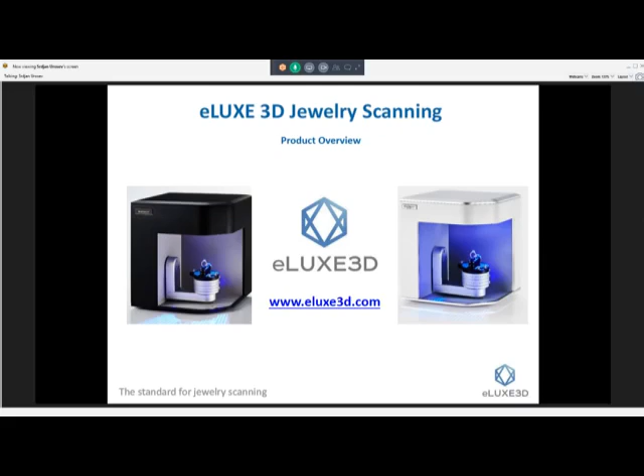For those of you who are not familiar with three-dimensional scanning, the two primary forms of 3D scanning are laser scanning or structured light scanning. Laser scanners tend to have a sweeping red, blue, or even green line that's automated or sometimes manually operated with some sort of external coordinate measuring machine, usually a fixed line that sweeps along the part, and that acquires point cloud data, which is ultimately turned into an STL or polygonal model.

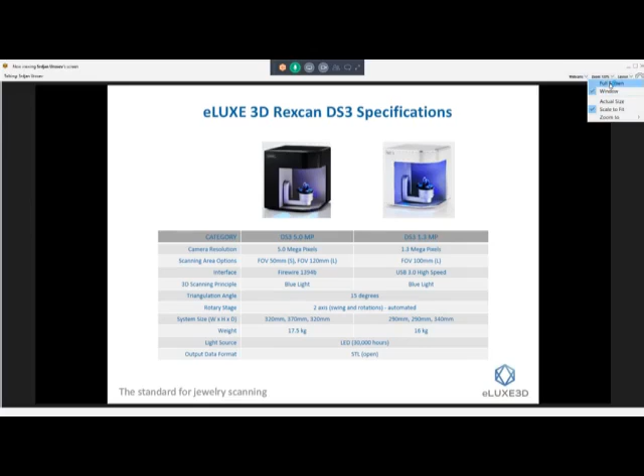Our technology is a little different as it works in a structured light fashion, so it's a megapixel based system. It works just like a digital camera. Your iPhone or traditional digital camera is a 5 megapixel, 10 megapixel, maybe 40 megapixel system that acquires images in 2D. Our technology has the same principle and philosophy, but it collects images in 3D. So we're able to project a fringe pattern onto the object, and the two cameras that are collecting and looking at the fringe pattern define the resolution and gather the data in a three-dimensional fashion.

So we don't have a lot of moving parts. The only moving part you're going to see within the scanner is the platform, the swing that rotates and has a fully automated swing. You'll see this live in just a minute.

The two systems that we currently carry commercially are the Rexcan DS3 Silver and the Rexcan DS3 Gold. The primary difference between the two systems is in the resolution. The Silver system is a 1.3 megapixel system, a USB based system, collecting 1.3 million points per shot. The DS3 Gold is the 5 megapixel system, defining a very high resolution, collecting 5 million points per shot. With that, you can see some of the technical specifications.

On the DS3 5 megapixel system, we have developed two versions: a 50 millimeter field of view and a 120 millimeter field of view. We initially had just the 120 millimeter field of view, and when I say field of view, that means how large of an object the system can see within a single scan. So 120 millimeters is the maximum, for example, on the large field of view. With that, we developed a 50 millimeter field of view, which is a very high resolution system, primarily targeted around high detailed, detail-rich objects such as engagement rings and high resolution stones with a lot of features. So it's specifically designed for rings and very small objects within that 50 millimeter field of view.

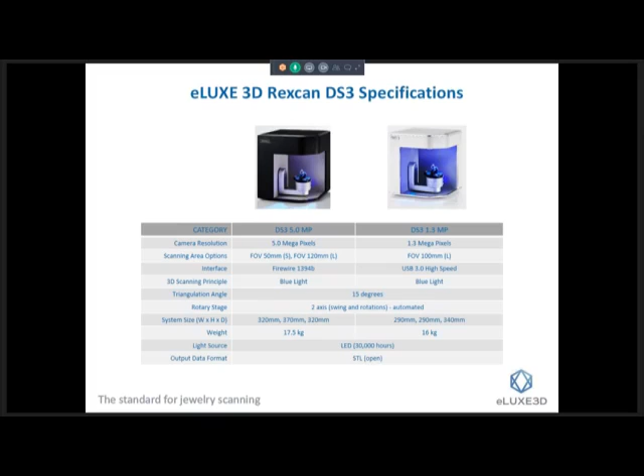One of the advantages our systems carry is that we have an open STL platform, so we don't lock you into specific software that don't necessarily have any digital models. This gives us the opportunity to provide you with a digital model of some of the precious stones or precious pieces that have a lot of history behind them.

Custom fit wedding bands is a very popular one. This process has taken a 3, 4, 5 day process down to less than a day. In 3 to 5 minutes we're able to capture a perfect 3D model of that engagement ring, giving you the opportunity to build that wedding band with a perfect fit. It really saves on the iterations of 3D printing and design iterations, so it's becoming very popular.

3D heirlooming, or digital heirlooming, is another format of use for our technology. Old existing pieces that may have been passed down to family members within generations can now be replicated or actually stored in a digital format, since they have some family history behind them. So it's something a lot of our customers are doing.

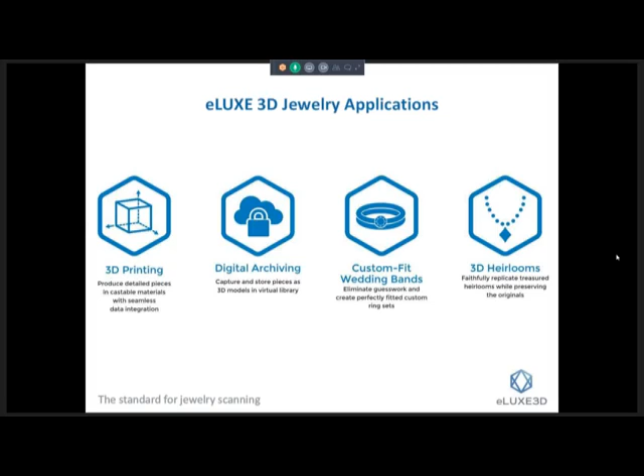This slide shows a simple ring that was scanned with the 1.3 and a 5 megapixel system. The image on the left is the 1.3 scan, and the image on the right is the 5.0 megapixel scan. I'm talking about the single image on the left-hand side of the screen. You can see that the resolution with the 5 megapixel system is a little bit sharper, a little bit crisper, which is defined by the triangles in the lower right-hand image.

To us, having been around the scanning industry for a very long time, this is something we can clearly see. But to somebody that's just looking to acquire data quickly for template or design purposes, the 1.3 megapixel system is a great system. So you can kind of see the correlation between the two data sets.

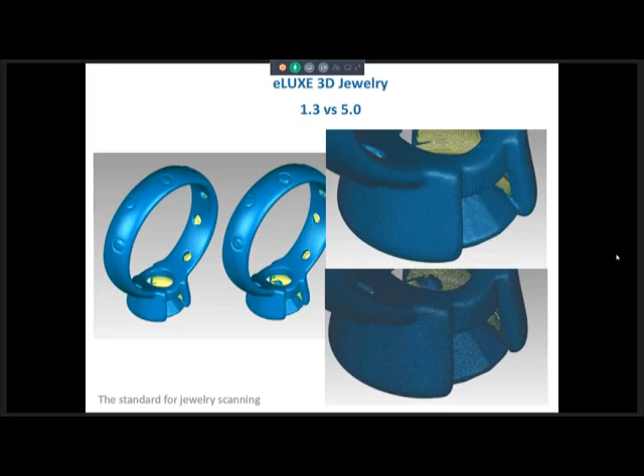Just a few samples for you of STL models. We're seeing here on screen our STL models that are created from our scanner. So everything you're seeing are basically triangulated and fully watertight models.

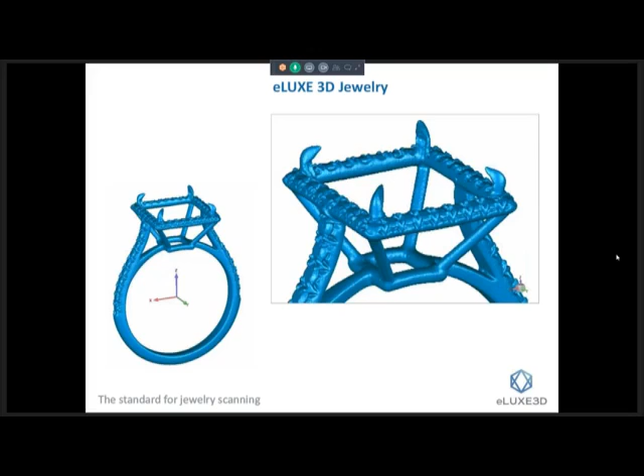Here's a ring that was scanned with a 5 megapixel system. You can see the detail and resolution, it's able to pick up on those prongs and how sharp and crisp they come out.

Some old coins that were scanned in. Again, the detail is really something to pay attention to, because it's preserved very, very nicely in a polygonal format.

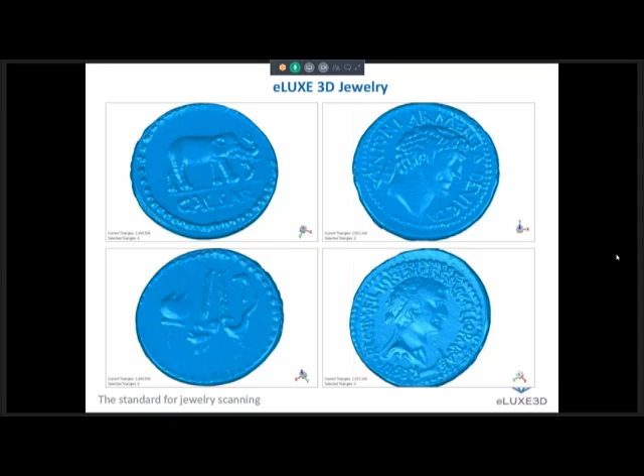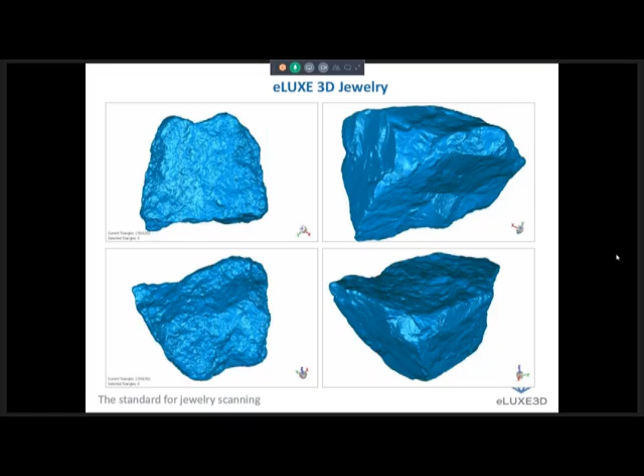These are just basic stones, but I wanted to show the actual capability and how much detail we're picking up. If you had some sort of irregular stone that you needed to design around, we understand it's a very difficult process with traditional calipers and tracing methodologies, but we have the ability to provide a very detail-rich model for you to work with in your CAD packages.

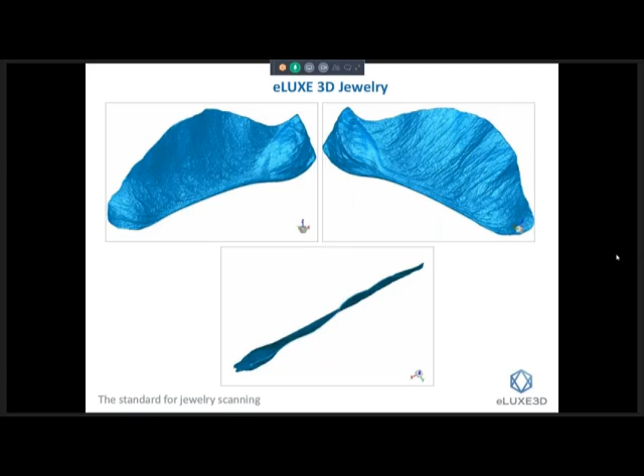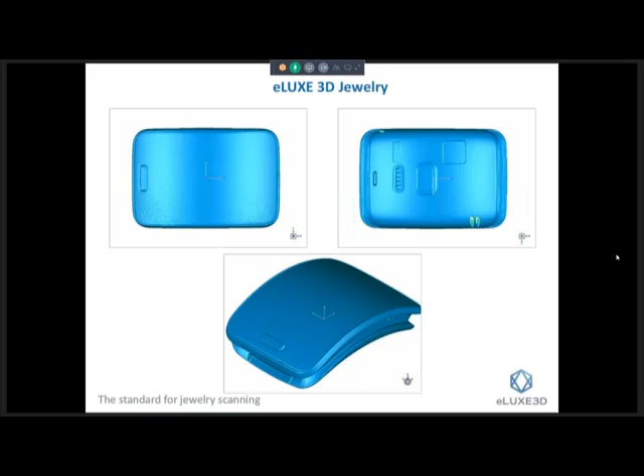So a lot of what we're talking about here is STL format-based. For our purposes at eLUXE 3D, we are heavy users of Geomagic simply because we've been around it for a very long time. Geomagic Wrap in particular is a platform that we utilize for cleaning up STLs, for having the ability to fill in holes, extract features, and actually create NURB surfaces. It's a product that's been around for a very long time and has developed a lot of great tools for being able to work with high-resolution STL models.

A lot of our customers use a combination of ZBrush, Rhino, Gemvision Matrix, 3Design, and a few others that are out there. But we want to put enough tools in front of you to understand what you can and can't do with the technology and what the limitations are.

Because if you think about how much data we're collecting, millions and millions of polygons, there are certain CAD packages that are not designed to handle this type of geometry. So we're always working with our CAD suppliers and vendors to improve on their processing side. But for our immediate need, our go-to product is Geomagic on the reverse engineering side and on the inspection side. As I mentioned, it has a lot of polygon sculpting and cleanup capabilities to get you that watertight model.

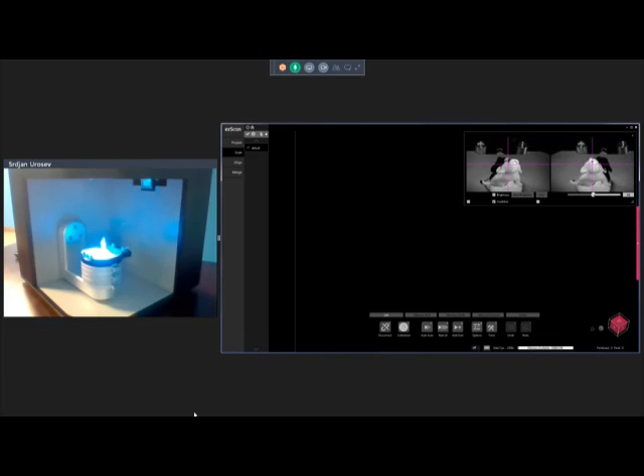Okay, we're back. Successfully transitioned from one piece of software to another, so that's always a good start to the day. As you guys know, technology doesn't always behave perfectly, but you should be able to see a webcam showing the actual platform of the scanner itself, and in the background, depending on your layout, you can see our product in the software format we're going to be using to collect the data.

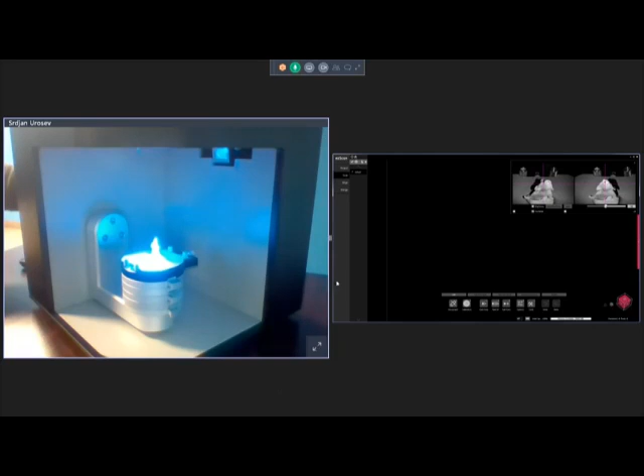So what we've done over the past couple of years is really focus on developing a software product and a hardware product that's very easy to use, very automated, and doesn't require a lot of technical expertise.

eZScan 8 is a software platform that was recently launched in conjunction with the DS3 and the silver and gold systems, and we were really able to create a product that follows a process.

Just to show you a little bit of the layout and how this software is actually developed: on our left-hand side, we have basically our project tab, which is going to be our starting tab for starting a new project or opening up an existing project. And then we follow a process: we have our scan tab, align tab, and merge tab.

We really want to create a process flow that your technical people are using as you're walking through the scanning process. So anything within your scanning capabilities that allows you to acquire data would be under your scan tab.

You can see this is a live feed. The left and right cameras are actually live right now. So if I put my hand in there, you can see that it's actually picking up the data live.

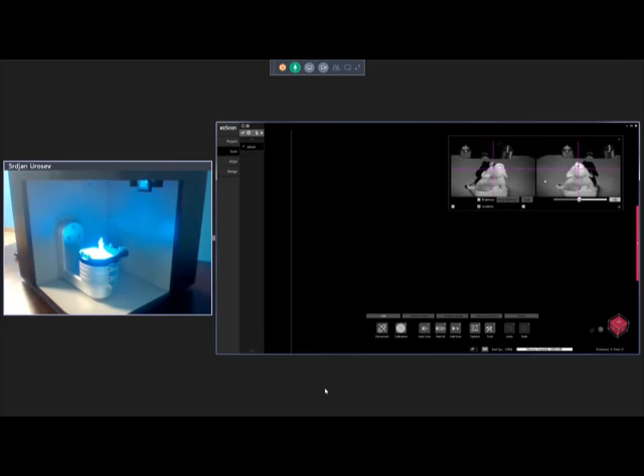This little pendant that we're scanning is a little puppy. It's about an inch in height, so it's relatively small. It has some detail on it, and this is what we'll be working with today.

Down at the bottom, within our scan tab, we also have a process that steps you through steps 1 through 7, 8, 9, if you will. This basically guides you through the operations that can be run through our scan tab.

Connect and disconnect our scanner, calibration process, which is probably a weekly thing and takes about 3 minutes to do, and then we go through our scanning procedures here. So again, everything we try to do and develop is in the automated fashion.

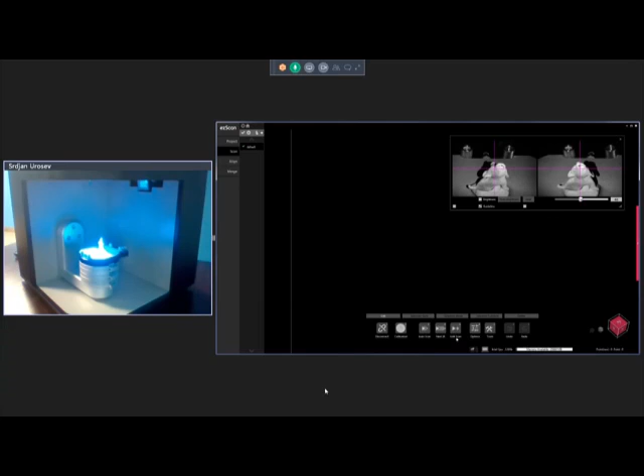We have what's called auto scan, which we're going to be running - it's just a string of macros. We have a next 10 button, which is kind of unique to our technology, where the software automatically calculates the missing areas in the scan and generates the next 10 paths. Or we have what's called add scan, which is just an individual scan. So if I click on add scan here, the system is going to move to a position we're looking at currently, and it's going to take a single shot.

And there's what we're kind of seeing on the screen from one orientation. Now you can tell that we've scanned some of the platform, the fixturing system that we currently use is just some putty.

The system does come with a ring jig, it comes with a full fixturing setup. But anything that'll just kind of fixture your object in a permanent orientation can be utilized to hold it in place. Your object cannot be moving independently from the swing or the turntable.

So what happens during the calibration process, we actually create an internal coordinate system that's saved within the calibration file. So every time we move this swing, it knows its previous position and registers the data together.

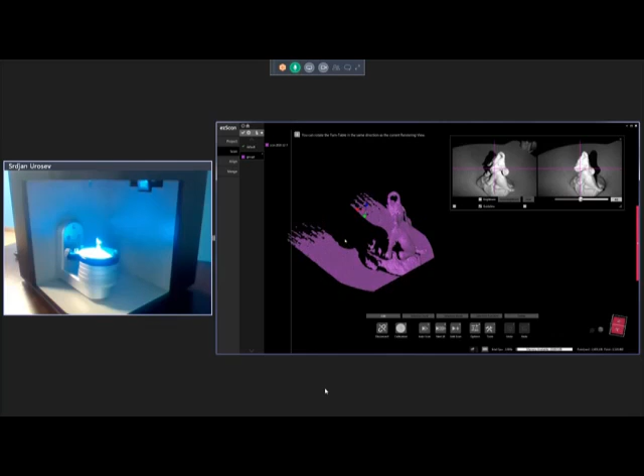So one nice tool I like to use here to avoid scanning some of the turntable or the platform is we're going to turn on what's called a clipping plane. I may be getting into some of the technical aspects of the software, but it's kind of nice to show. So what I'll do is turn on our virtual clipping plane.

I'm going to drop that clipping plane to right about there, and then we're just going to go ahead and hide that. Now as I run our macro, we're going to go through and delete anything that's below that plane. So it really saves a little bit of time and cleanup and processing. I'll go ahead and delete this group.

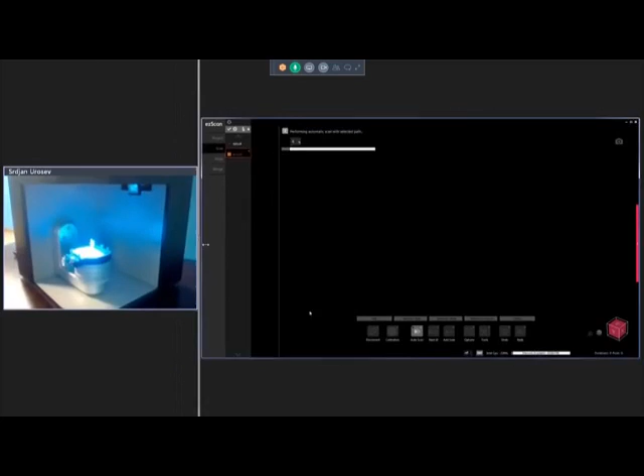Instead of doing an individual scan, I'm going to run through what's called an auto scan. This is basically a macro of, I think, 12 to 14 positions that we have for demonstration purposes. So it's really hands off. You set the part down, you fixture it, hit the play button, and let the software do its thing.

There's no registration that has to be done on the fly. Everything is done automatically as far as scanning is concerned. Looking back on our left-hand side, we have a group 1 that's being created.

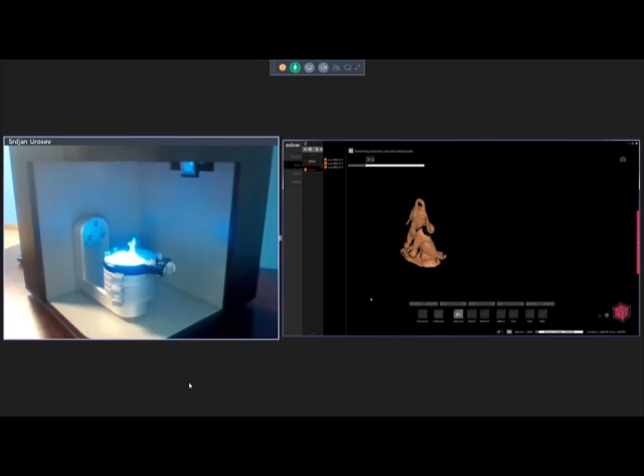So as we're running this macro, the software automatically creates a group, and within that group you can see scans being populated - scan 1, scan 2, scan 3. It basically follows with a date and time stamp, but those names could obviously be changed if needed.

So we're scanning live right now, as you should see on the screen. This puppy is being populated very, very quickly. I'm going to zoom in a little bit for you guys so you can see some of the detail.

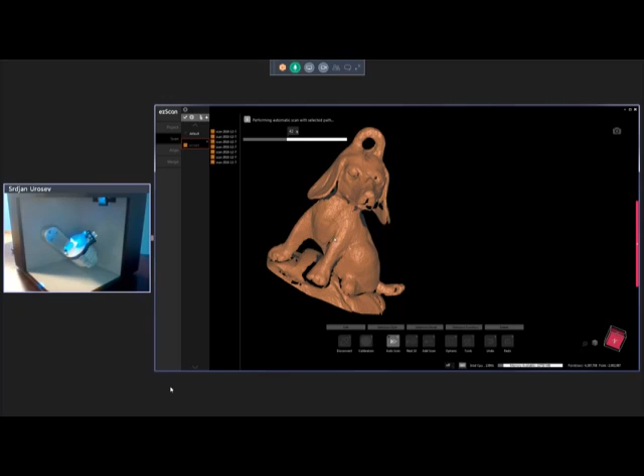There are some waves in the actual design of this piece. The eyeballs are some sort of tiny little stones, but this detail you're seeing, this orange peel texture on the puppy, is actually on the object. This is not scan noise or something like that - this is actually detail that was designed into our piece here.

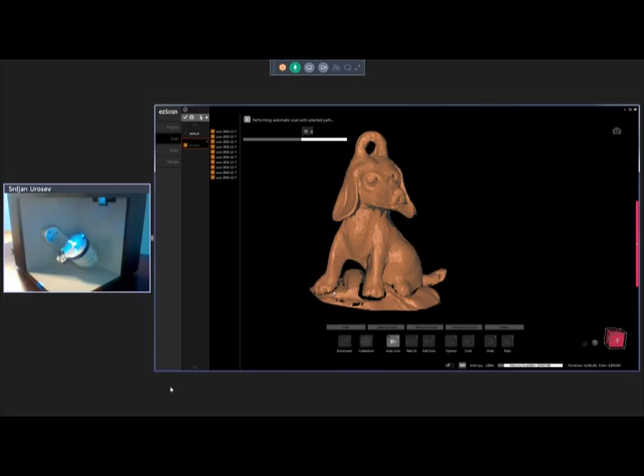So we'll let this finalize, and then what I'd like to do today is walk you through the full process and what limitations we have with the system, and what we need to do in order to have a full 3D scan that might be watertight, if you will. Because as you may know, with non-contact scanning, it is line of sight based.

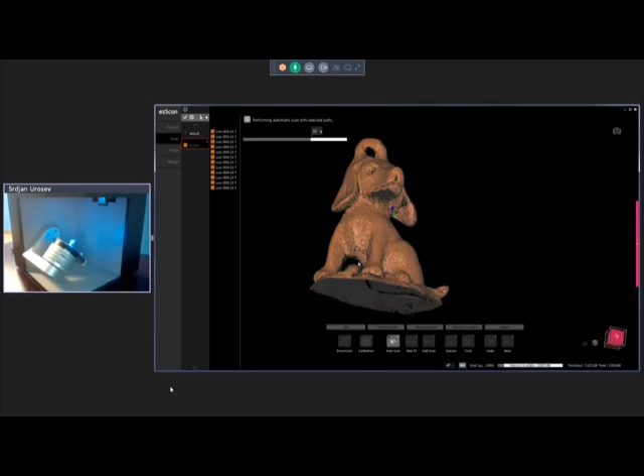What line of sight means is that what it sees, it will scan. So if I gently rotate this guy kind of upside down, you can see we're going to have some missing data simply because the scanner can't quite see that location underneath. So some objects, some very high detailed rings that have pockets or holes not visible to the naked eye in certain orientations, the scanner might have a hard time seeing those.

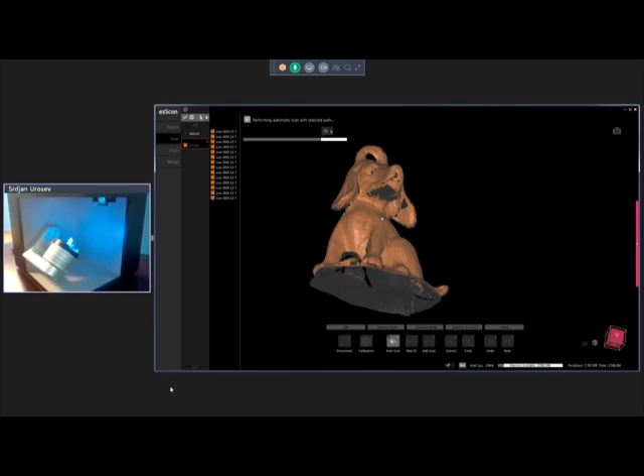But with multiple orientations, we typically are able to gather most, if not all, of the data. But that's just something for you guys to understand - we're not seeing through objects, we're not seeing through the actual physical object. We don't see through stones. It is line of sight.

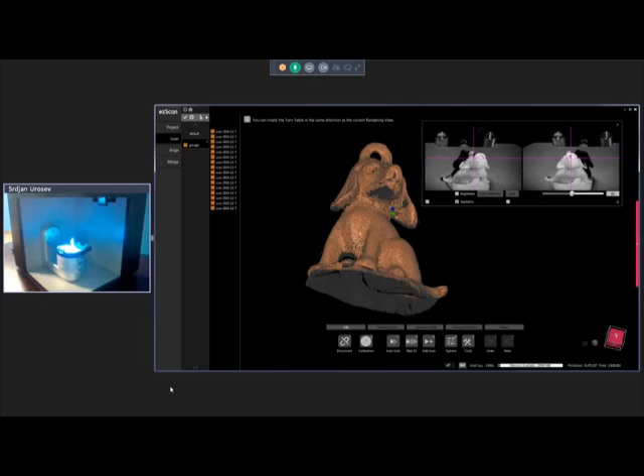So quickly, at this point, what I'm going to do is delete some of this putty, or the fixturing, if you will. I'm going to turn on my edit command. I'm going to use a free shape and a select.

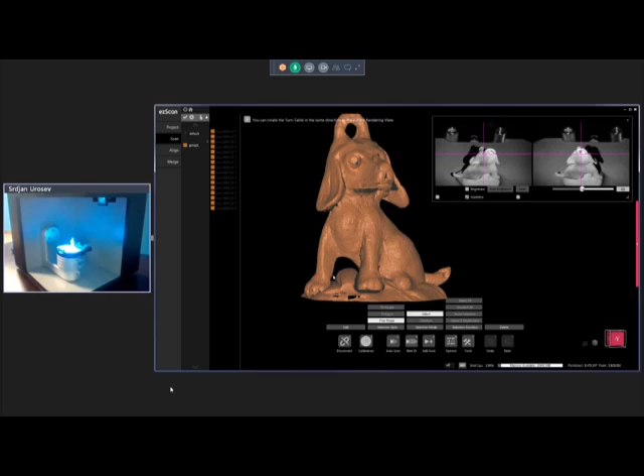So what I'll do is just kind of select the areas that I don't need and just delete them out. And if I touch on a little bit of our actual part, our puppy here, it's okay, because what we're going to do next is flip this puppy upside down and gather up and collect the rest of the missing data, and then walk through an alignment process.

So again, we're doing this live. There are no tricks here behind what we're doing. We just want to get you guys to understand the full capability of the product.

It's a very easy workflow. If you put down the product for a couple weeks and turn it back on, it's not something you have to reach for the manual for. It's something you will pick up automatically, which was kind of our key in trying to develop and streamline this process.

I'm going to do a quick save as here, and we'll just call this Pup1. I get in a habit of saving quite often, as you typically don't like to lose work, and in case there's some sort of a crash, you always have your file saved.

Okay, so here's what we're going to do now. We have our group 1, which has probably 85% of our scan, but we are missing a little bit of this guy on the bottom. So what I'm going to do is actually remove this platform from our scanner, from our jig, and take this puppy off. I'm really doing this live, so please be patient with me.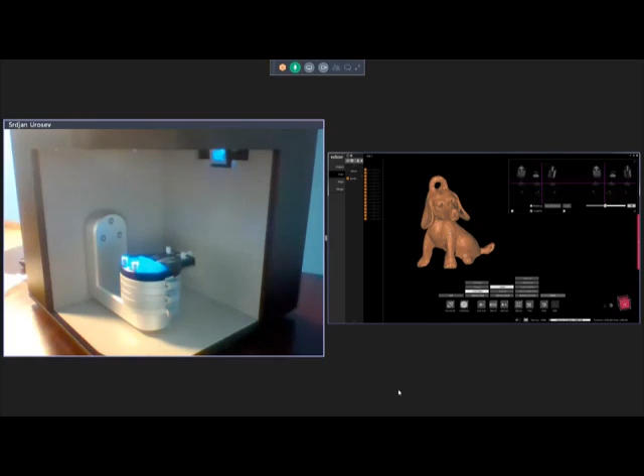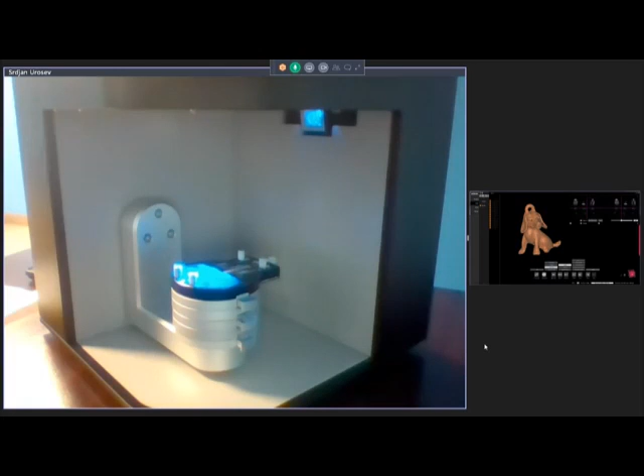We're going to just flip them upside down and fixture them back in. One thing I should have mentioned, we do add a little bit of spray on the object. With scanning technology, if it's very shiny, reflective, transparent, or translucent, you do have to spray the object down a little bit, which takes that shine and reflectivity off. It's very common with most scanning technologies out there.

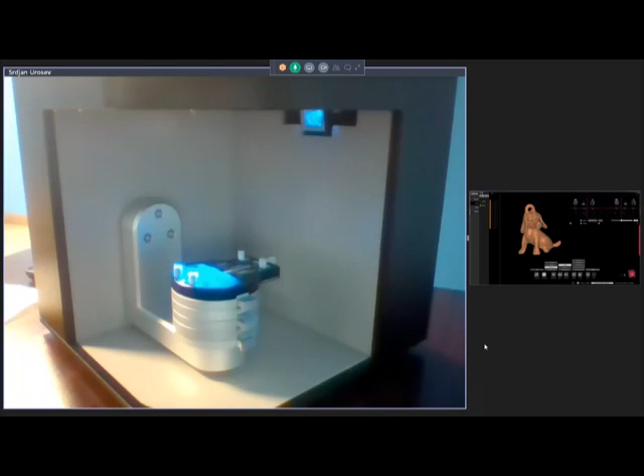We have several different forms of spraying down the object, whether it's a 3D scan spray, or a mixture of washable paint and an airbrush kit, and that's something we will definitely walk you guys through as needed. So right now I'm going to flip this puppy upside down, and add just a little bit of spray to it.

Obviously you won't be seeing that portion, but trust me, that's what I'm doing. Make sure I've got him fixtured in so he doesn't move. You might be able to hear the spray in the background a little bit.

This spray that I'm using is actually a 3D scan spray developed by a company out of Germany called Helling. It adds about 3 to 5 microns of spray depending on how much texture you put on it, but it's a very fine spray that does not take away from the detail of your object.

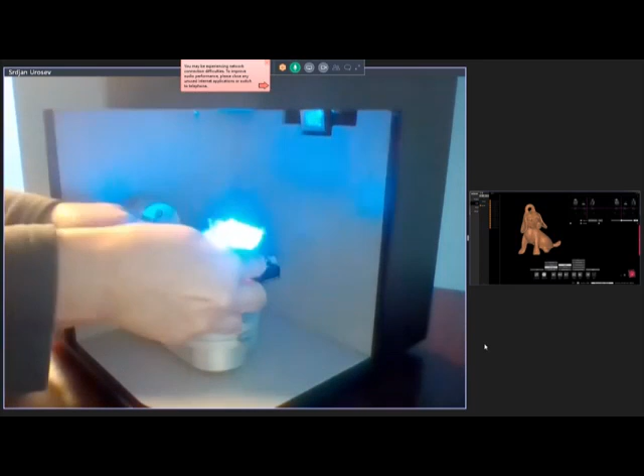Okay, I'll go ahead and drop this guy back into position. Tighten up our fixture. And now you can see our camera is seeing a different view, different orientation.

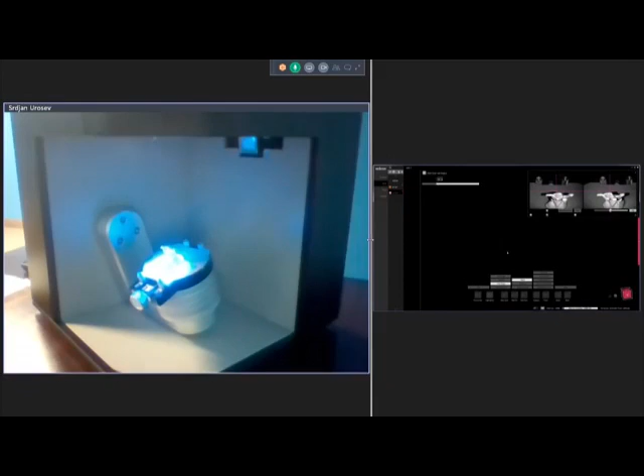At this point, I'm just going to go ahead and click on the auto scan button. Actually, no, at this point what I'm going to do is take one scan because I'd like to predefine my clipping plane again. In order to predefine that clipping plane, you want to have one scan on the screen so you can see where you're trimming with the virtual clipping plane. Otherwise, you might be taken away from your object.

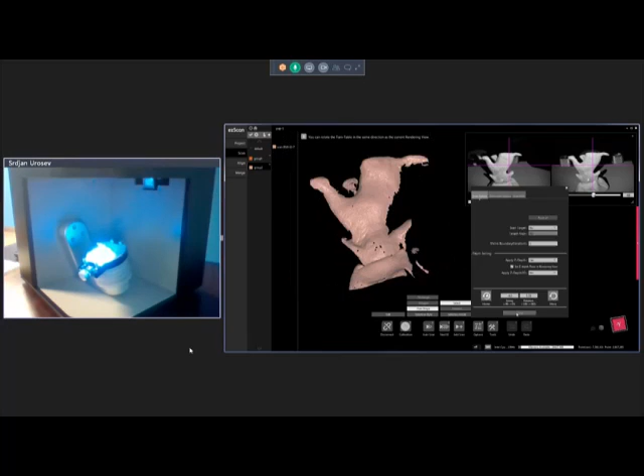So I'm going to go back into my options, turn on my clipping plane, and you can see that I can definitely bring this up a little bit. And we're good there. I can delete group 2.

And then I'm going to run auto scan, same macro. So the macros are basically kind of embedded in the product. You can create your own macro, and all a macro is a string of positions, a rotation and a swing. It's an XML file, and it can be edited.

They could be generated within the tools and the options that we provide. It could be edited in just a notepad or some sort of comma separated value format, but all it is is multiple orientations and a swing in position. Once the actual swing moves, the scanner takes over and takes a picture.

And now you can see we're kind of filling in the blanks. I'm running the same exact macro as we ran for group 1. As you can see, on the left-hand side here, we have group 2 that was created, and all the individual scans that fall within group 2.

Our next step is going to be to take group 1 and group 2 and align them together. This is something we're going to do in this product as well. So as soon as this is finished, we'll clean up some of the areas that we don't need, and we'll align them together.

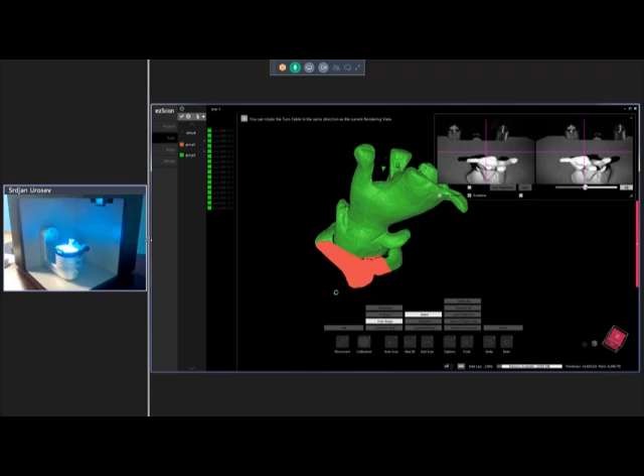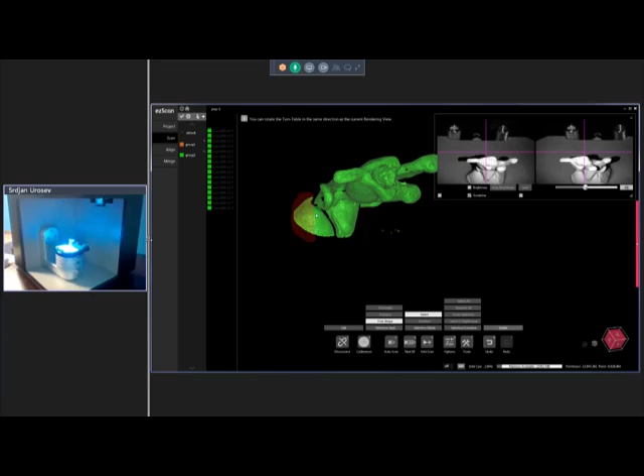Hot glue is used quite often. Our customers have developed some of their own fixturing systems. The system, as I mentioned, does come with a very nice ring jig. It's basically a mini vise with some rubber padding on the inside, so it doesn't really deform your object. Again, the goal is just to fixture the object in an orientation that will prevent it from moving during scanning.

Okay, so now we have the bottom portion of our puppy scanned. To play it safe, I'm going to do a save as and overwrite the previous file. So we have that saved. Yes, we'll overwrite it. Now that our scanning is complete, we're going to go to the next phase, which is our align phase.

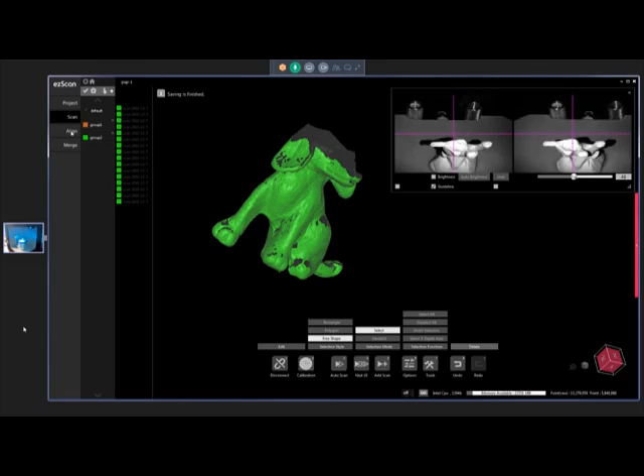As I click on the align phase, our cameras disappear. Now our icons down here at the bottom also disappear and change, and now we have a couple forms of alignment that we're going to be able to work with.

I'll go ahead and turn on group 1, so you can see that we have 2 groups of scans that are in different orientations. And then we have a couple different alignment options here: a 1-point alignment, a 3-point alignment, a manual alignment, and then a global alignment. These are very standard alignments that you guys may have seen in other CAD packages.

So 1 point is most common that we use. It's a very nice form of alignment. You just click on one common point and the software will take over. 3 points will allow you to pick 3 common points. Manual alignment will allow you to just rotate one of the objects on the screen manually. And then a global alignment is basically a curvature-based global registration that we'll do as a final step to ensure all the individual scans are globally registered.

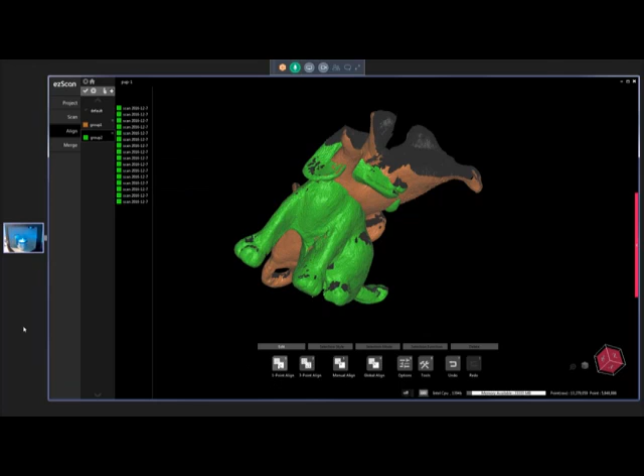So what we do here is we click on the group that we want to move. I'll make group 2 as my movable object. I'm going to click on that, and I'll click on 1-point align. This breaks up our screen into 3 orientations.

We have our blue, which is our movable, in the upper right-hand side. We have our white model, which is our fixed model, in our lower right-hand side. And then on the left side, we have our blue and white showing us what the actual alignment is going to look like when done.

So with the 1-point align, the only thing you have to be concerned about is that you have these objects approximately in the same orientation in 3D space, right? So I basically have the puppy approximately aligned in the same orientation in both views here, and we're going to click on one common point. So I'm going to click on this little neck area here. This point is approximately there.

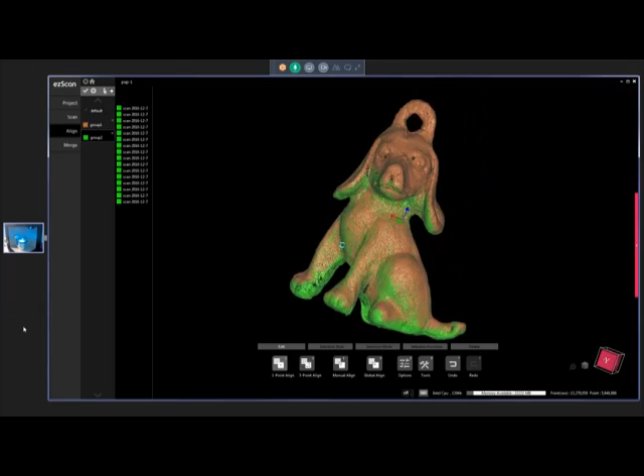The software takes over and then looks for the overlapping information, and if you can kind of see on the left-hand side, based on our view orientation and the common curvature between the two, it snaps them together very nicely. It gives you a bit of a distribution chart, giving you an error and the distribution deviation, how much the actual objects have moved when aligned. So we're within about 8 microns as the average distance along all these scans. We'll click enter, and yes, we want to apply those changes. So now if I look at my 2 groups of scans, they overlap quite nicely.

One final thing I like to do is do what's called a global alignment. So we just did an alignment based on individual groups. I'm going to click on this little finger up here, deselect all, and actually select all, and then click on global alignment.

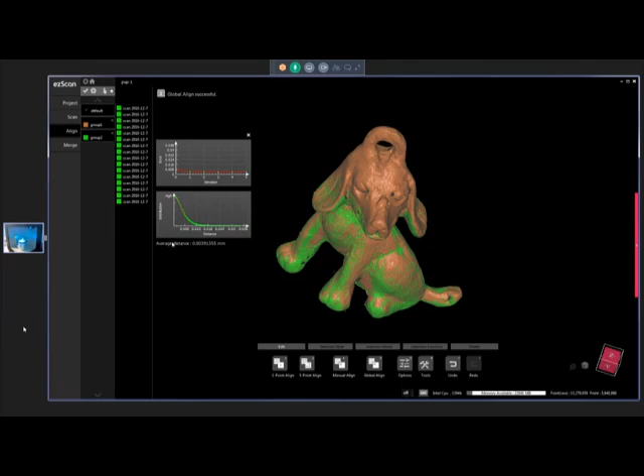What global alignment does is actually takes over all the scans on an individual scan basis and does a final global registration, kind of bleeding through in case there was any vibration or in case I bumped the scanner or bumped the desk or something of that nature. It just tightens everything up. So you can see that we went from approximately 8 micron distance down to about 3-4 micron as the average distance between scans. And you can see the colors, how they bleed through in a format that tells me that this is a very good registration and I'm happy with it.

So at this point, we're going to go ahead and save this again.

And then we're going to walk through the final step, which is our merge. So we're going to go to our merge tab. Merge is basically exactly what it states. We're going to merge these objects into one individual STL.

Right now, they are still based on 2 groups with about 15 or 16 scans in each group. I'm going to go through and select both of these groups, click on the merge object, and then we have some tools here to work with.

Some of the tools we predefine are strictly based on our merge resolution and file size. File size is linked to how large of an STL you'd like to have. My default merge resolution, or the triangle edge length or point distribution, is about 25 microns, which is pretty good. Most printers are printing at about 10, 15, 25 micron settings, so that's pretty good.

Output file size is going to be medium. We're going to decimate this from approximately, if you look in the lower right-hand corner, 13 million points, down getting rid of approximately 65-75% of that data. So we're keeping the resolution of our data intact, not losing any detail, but really minimizing how large our file size is. You can input a custom value here as well based on percentage.

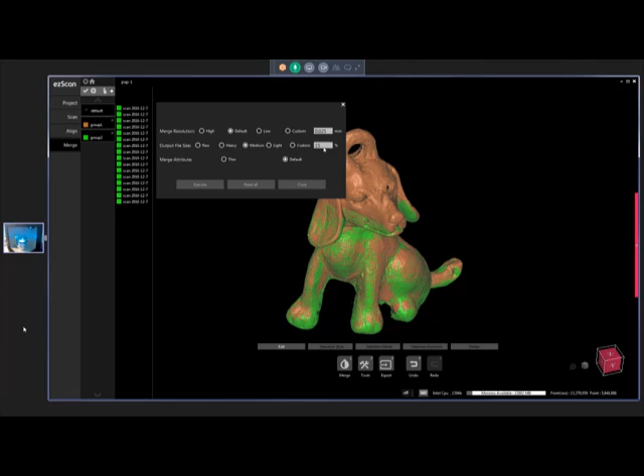So we'll just go with default and medium. We'll go ahead and execute that. We'll say yes because we have saved this. And now it's going to take a minute or so, or maybe hopefully less than a minute, to merge this together.

In case you guys are wondering what kind of machine I'm running on, I have an off-the-shelf HP ZBook with Windows 7 with a Core i7 processor. We do need some horsepower between a laptop or a desktop. We run on Windows 7 or Windows 10, but something off the shelf that you typically run your CAD system on would be sufficient to run the scanner. Graphics card is important, good processor is important, and the RAM distribution is relatively important.

One reason I like to save the files as I go along is obviously unexpected crashes every once in a while do happen, so you want to make sure you preserve your work.

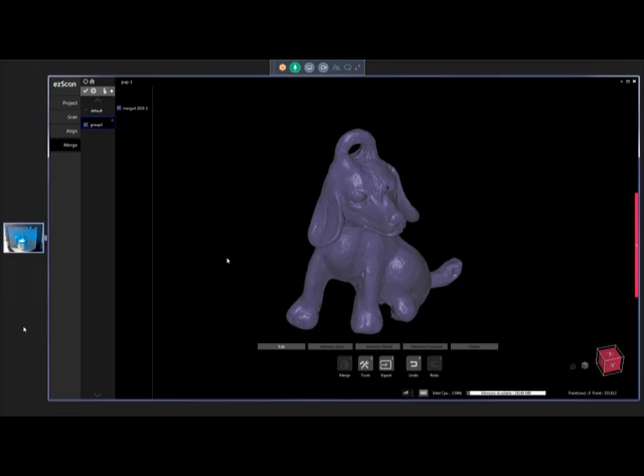Second of all, once you finalize your alignment and you have gone through the merge step, you can see that now we just have one group and one file. So we've merged all of those scans together, and you can no longer go back and add scans.

So we're actually now going to export out an STL or an OBJ file in this phase. If you ever wanted to go back and add additional scans, you really have to do it on the raw metadata file, which is an extension of MDT. That's our raw file format, and that will allow you to add additional scans, additional orientations.

So with file management, as our customers get familiar, they typically save the raw file format, export out the STL file. Once they're happy and working on the STL file within their downstream process, you can go back and delete the original metadata MDT file with all the raw information.

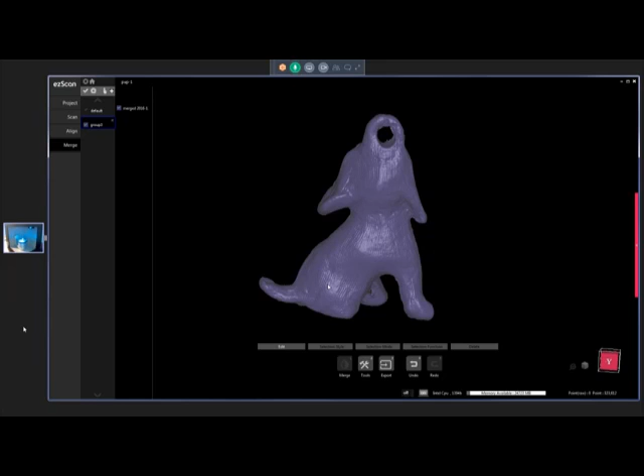So in a nutshell, that's basically the process of scan, align, and merge. At this point, we're going to say export, and I'm just going to say export STL with OBJ, PLY, a couple different formats. We'll drop this on the desktop again.

And that will kind of bring us to an end of the demonstration.

There are additional tools that we didn't cover here, some of the advanced tools I mentioned, going through and creating your own macro settings. We do have some decimation tools, just to walk through some mesh repair tools, smoothing, deleting of clusters, decimation, manual hole filling. So we do have tools that will allow you to massage the data or clean it up once the scan is complete and once the merge is complete. But this is part of some of the advanced training that we'll walk you guys through in the future.